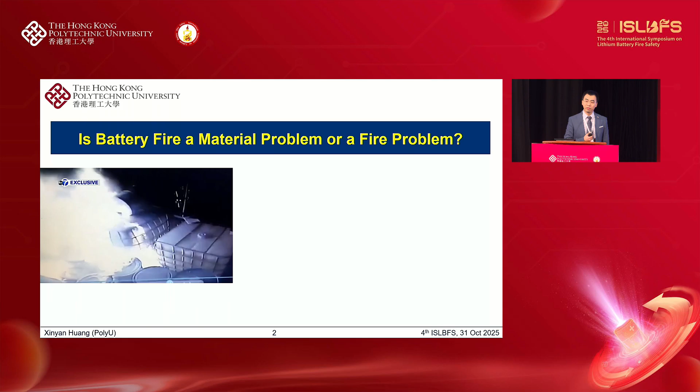This one is in a gasoline processing factory, and you can see a worker trying to clean up the containers, but unfortunately the gasoline is so flammable that even friction generating an arc causes an explosion and fire. Gasoline is really dangerous. I also see many short videos of people playing with gasoline in very dangerous ways. They don't even realize gasoline is really dangerous.

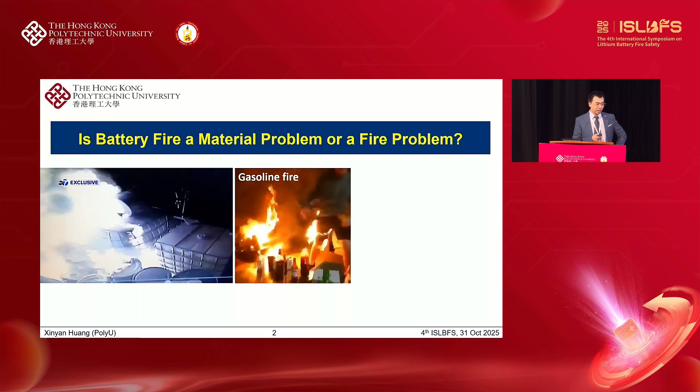But the question is, why don't we worry so much about the fire safety or fire hazard of gasoline, yet everyone talks about EV car fires? Not too many people talk about gasoline car fires. That's something I really don't know how to explain.

Until one day I saw this video. It's at a gasoline station, and you see someone forgot to take out their pipe, so it's a very dangerous fire. But what surprised me more is some random guy from the street just took a fire extinguisher and controlled the fire within 10 seconds.

This really impressed me, because I also teach my students about flash point concepts. Gasoline has a very low flash point - it's one of the most dangerous fuels you can think of. But some random guy on the street handled it in 10 seconds. This is the reason we don't really worry about gasoline fire, although it's considered one of the most dangerous liquid fuels on Earth.

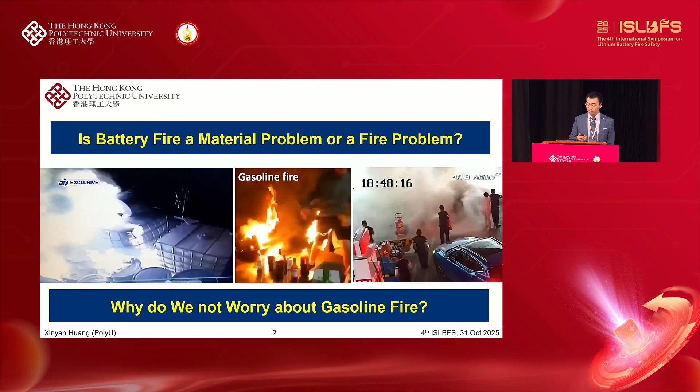So is the battery fire a material problem or a fire problem? No matter what the answer is, I've listed a rank of material fire safety. No matter how safe the battery is, I don't think it will be safer than wood or plastic. No matter how unsafe the battery is, it cannot be worse than gasoline, so it will always be something in between. No matter what battery material or technology is involved, it will follow that rank. That's my thinking.

So whatever material science does, you cannot change this rank. But what can be changed is the fire protection system. Fire protection can make gasoline feel not so different from wood or plastics. So if we can do something good, we can also make the battery no different than plastics and wood.

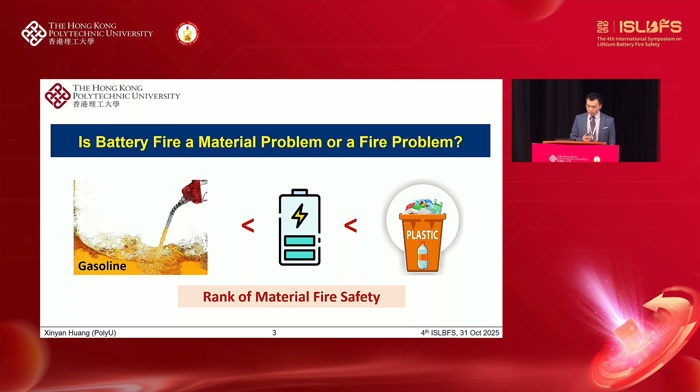Let me get to another question I'm also thinking about: what is the probability of a battery fire? I think insurance companies consider that a lot, and also manufacturers and warehouses. Many people consider these questions. I don't know the answer, but let's change the question - this question every fire engineer knows: what's the probability of a building fire?

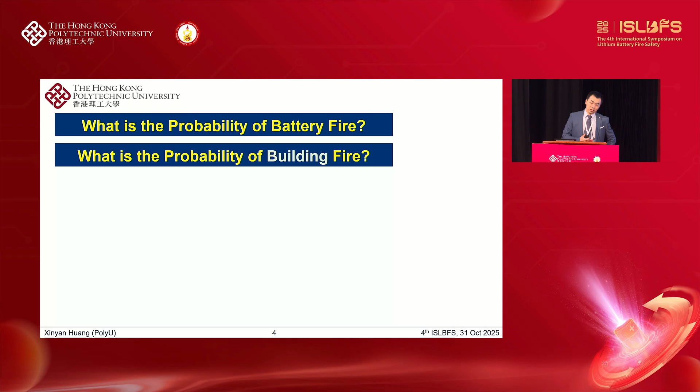Every fire engineer will give you that simple answer: 100%, because we assume the fire will happen. What's the probability of having a fire in this room or on this table? 100%, because even if we do everything so well, some crazy person can come here and do something crazy. So the fire will always happen.

So it doesn't matter, because as a fire engineer, we make sure even if the fire happens, we control it. Even if the fire happens, we make sure people can evacuate from the room safely. This is the reason for all building design. Why do we have two staircases for high-rise buildings? Why isn't one staircase enough?

Because we need to make sure even if the fire happens and one staircase is compromised, we still have another staircase to use. That's the reason almost every building in Hong Kong or many other cities is equipped with a very expensive sprinkler system.

The sprinkler head is very cheap, but think about the pipes, the space it takes, the maintenance cost of the sprinkler system - so expensive. Even though it's expensive, we still install it because we know fire will happen 100%, even by accident. So we need to make sure even the fire happens, we control it, we can handle it.

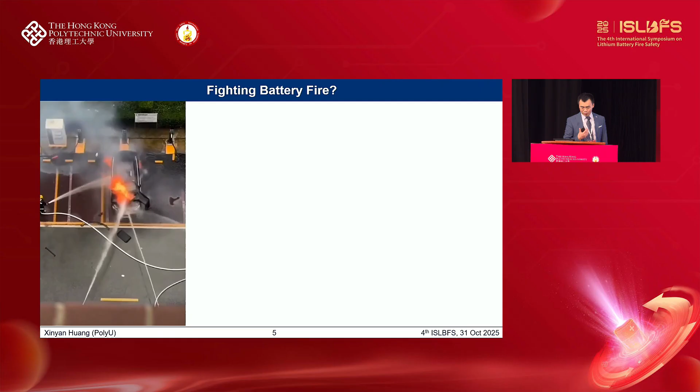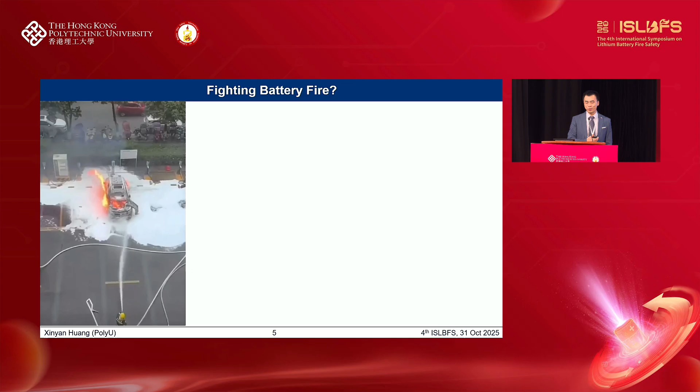So how do we fight the battery fire? You see a lot of these videos, like firefighters go to the fire scene, see some electric vehicle burning, and I don't know what to say - it's kind of useless, right? Sometimes I also talk to the firefighters, you should just cover the vehicle instead of embarrassing yourself, because people will take these videos and put them online. It seems like you're not doing anything. So if we cannot even stop the fire in a very small electric vehicle, how can we handle a massive electric bus burning in the square? That's impossible.

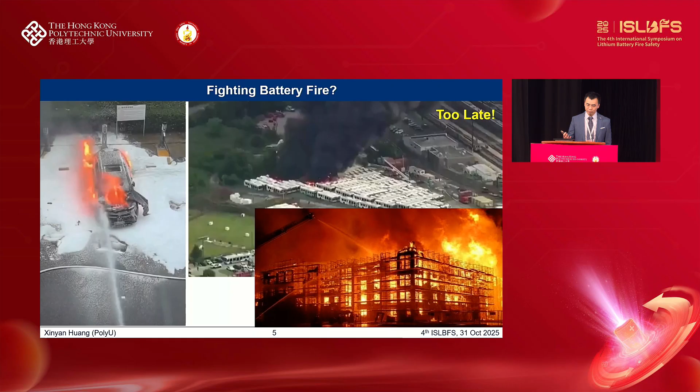And it also reminds me of something we handle a lot in building fires: when the building fire is completely out of control, you can see firefighters are not really extinguishing the fire - they just watch it and wait for the whole field to burn out. Because essentially there's no way you can stop a building fire like that. It's a very similar principle to how you cannot stop a massive car park full of electric vehicles burning outside.

So let's take a close look at what's the process of battery fire and compartment fire. So yeah, let me start this video.

So this is like a regular fire. You see the battery venting is on - this is a video accelerated. So you can see you have the venting, and you also have the fire afterward, right?

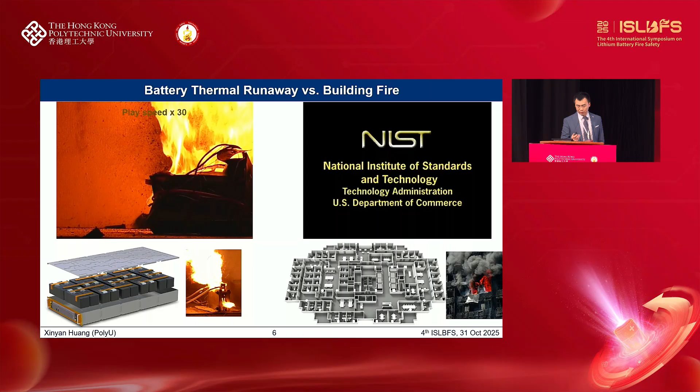If we take a closer look at the battery pack and a very typical floor plan, you will see they are so similar if we consider each cell as each room - maybe one small cell is the same as one small room. When the flashover happens, you see something very clear: you have that flame coming out from the room, seeking additional oxygen outside. We call that spilled flame. That's very similar to how you have the flame coming out from the battery. So if you consider these small elements, they actually look so similar.

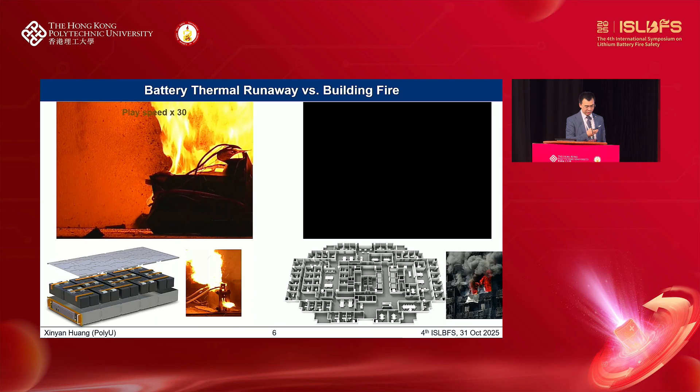If we look at the development of the temperature of any of these small cells, you'll see there are clearly two events: one is venting, the other one is thermal runaway, as we call it. If we put building fire, or compartment fire, room fire, as a comparison, we always have four stages of compartment fire: from ignition to fire spread, then the flashover event, to fully developed fire. So it's actually so similar if you look at thermal runaway and flashover.

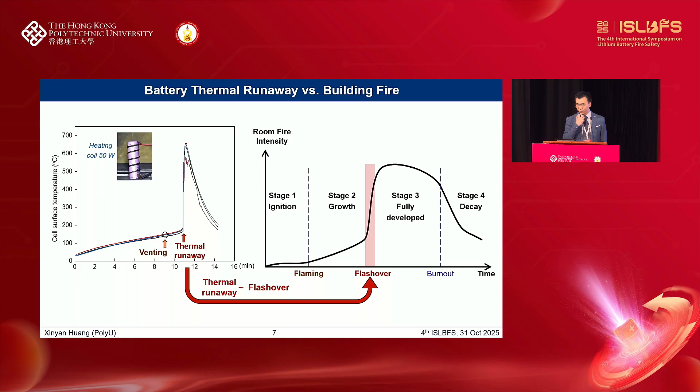And whatever happens after that is useless for firefighting. So that's what we see: you have the building and massive fire engines not able to stop the fire. It's the same reason that multiple fire hoses cannot even handle an electric vehicle fire.

So thermal runaway is not ignition, it's actually flashover. What is ignition? I think venting is ignition. After ignition, think about if we ignite this table in this room, the smoke will come out. It's very similar to the venting process. You have some smoke coming out from the confined space. So maybe this is really the ignition of the battery, not the thermal runaway. Venting should be considered the ignition of the battery fire.

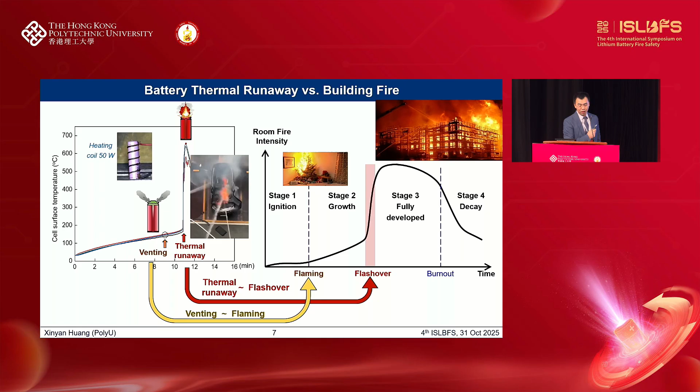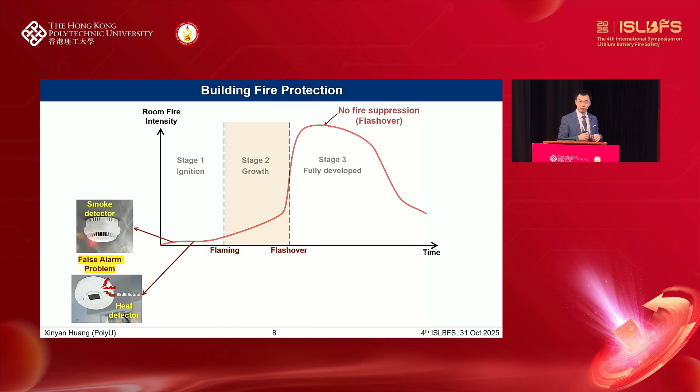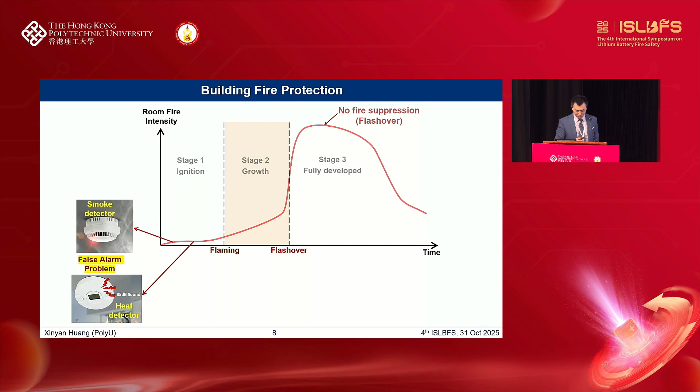So how do traditional firefighters or fire protection systems protect our buildings? We have multiple ways. During the ignition stage, we have smoke detectors in the room. When smoke comes out, it sends a beep, although you have a lot of false alarms, because when people smoke in the room, you also trigger the smoke alarm. But it's fine. We also have other things like the sprinkler system. So if you have some small flame, maybe this table is igniting, it will come out with a very long flame and quickly trigger the sprinkler, and the sprinkler will suppress the fire.

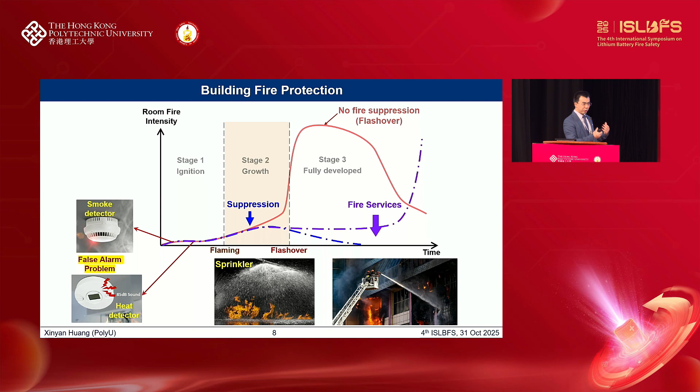Even if the sprinkler is too weak to control the fire, you can delay the flashover. That's the principle. Then, with collaboration, the firefighters can come, so the sprinkler gives additional time for the firefighters to stop the fire, and also gives people time to evacuate. So this is a design principle for building fire protection.

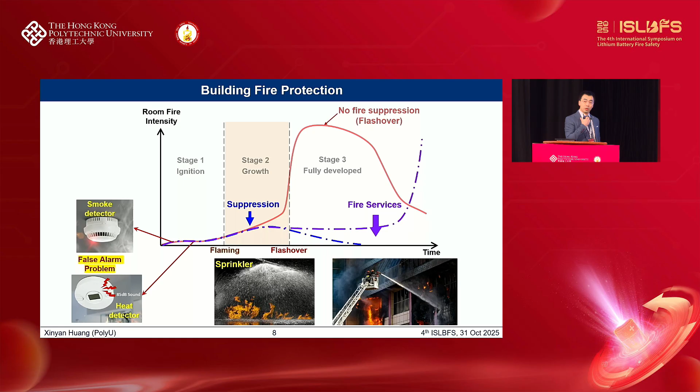So what's our current design for the battery? We have a lot of things, for example gas sensors, measuring hydrogen and other kinds of signature gases for battery thermal runaway. Yes, we have these sensors for the battery, and of course a lot of false alarms, similar to the smoke detector inside the room. So one thing that's missing is we don't have the sprinkler for the battery system.

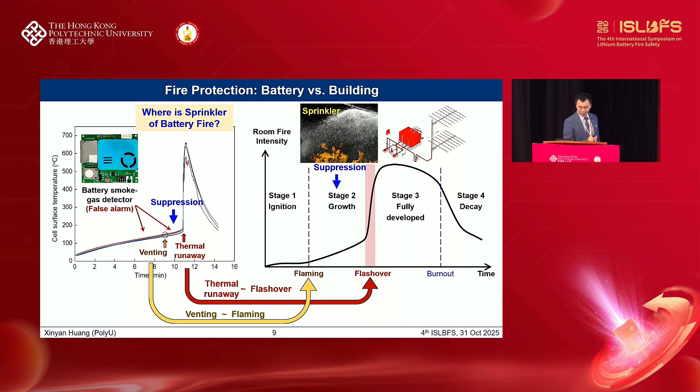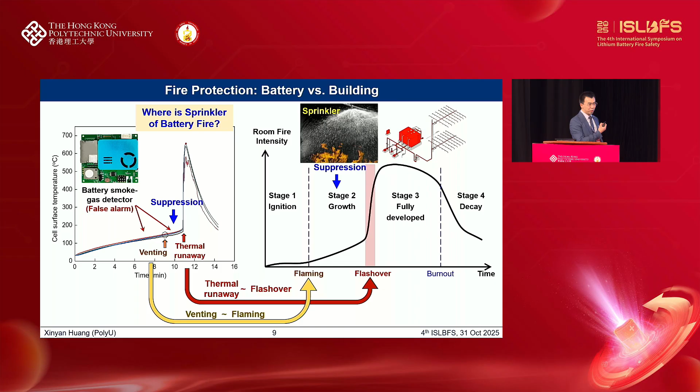Where is the sprinkler? Before the thermal runaway, or before the flashover. That's something actually missing here. So everything dealing with battery fire is after the thermal runaway, but that's already too late, because we all know when the thermal runaway, when the flashover happens, we cannot do anything for the building fire. Same thing, we cannot handle thermal runaway of the battery fire, because it's already too late.

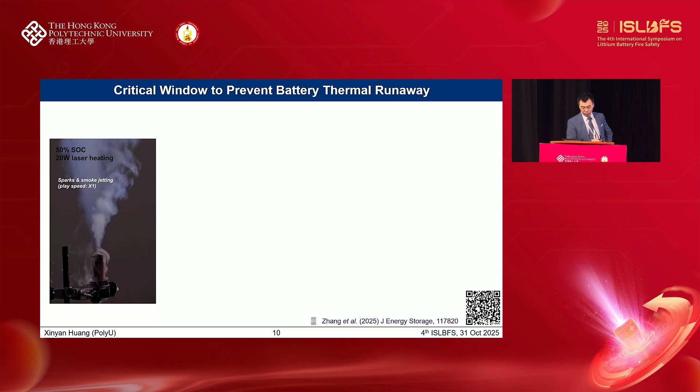So that's the reason we did a little experiment in the lab. We use a laser to ignite the battery, and now the venting happens. We keep using the laser to ignite it, to heat it. And as you can see, even as we continue to heat this battery, it still takes about 3 to 5 minutes before it actually goes through thermal runaway. The video is accelerated, so you can see after about 5 minutes you have a very strong thermal runaway and flaming.

If you take a look at this time evolution, you can see a clear time window here, between venting and thermal runaway. That time window can vary from 1 minute to 5 minutes, depending on what kind of battery you are testing. So you have a time window here, you can do something, but I don't think any company in the world is doing anything for this time window.

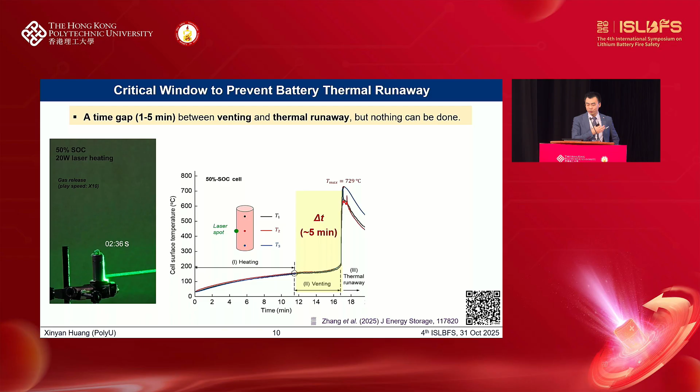You just let it happen, you just let the thermal runaway happen. So can we do something? Can we have some sprinkler system for the batteries, a sprinkler, not a real sprinkler? That's what we did in the lab.

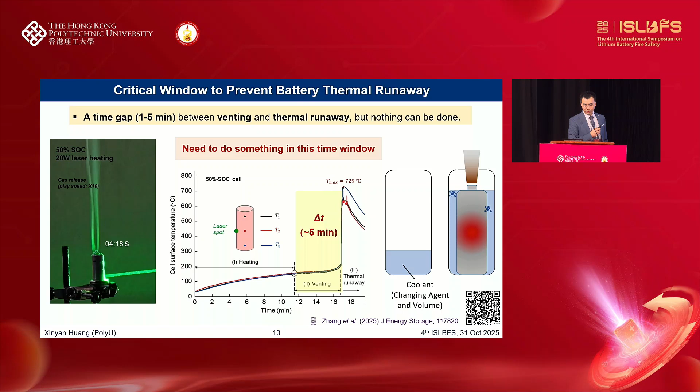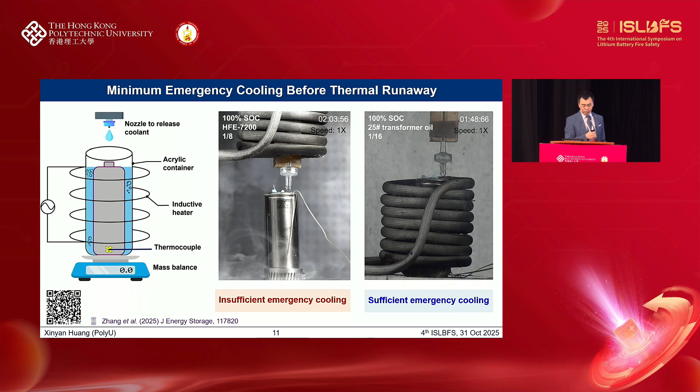My student did all these experiments, and he is designing a very smart device. He used magnetic induction heating to heat the battery. And once it starts venting, he drops some cooling agent and sees how much of the agent is needed to actually stop the thermal runaway. Of course, if you put too little cooling agent, the thermal runaway will continue to happen.

And if you put too much, then you are wasting a lot of the cooling agent. So what we want to do is try to find out the minimum amount of cooling agent that actually stops the thermal runaway from happening after venting. You can see on the left-hand side, clearly we don't put enough cooling agent, so the smoke keeps coming, and eventually it evaporates all the cooling agent.

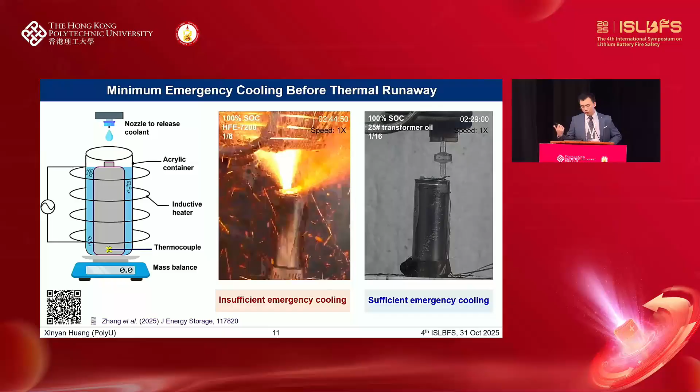So the thermal runaway will continue to happen, but on the right-hand side, we have enough cooling agent. You can see bubbling coming out, but the battery eventually does not reach the thermal runaway stage.

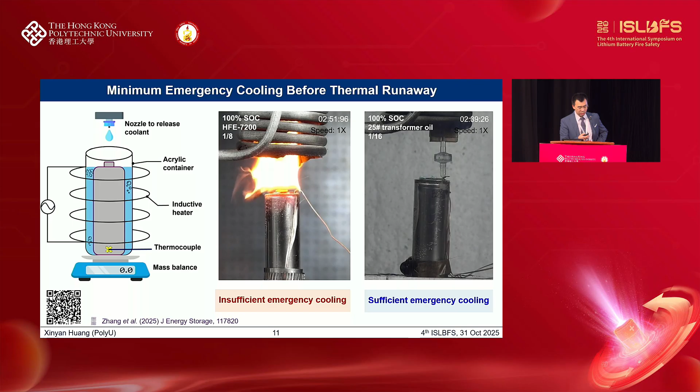We found a very interesting result: you only need 1/16 volume of the battery in water to stop the fire. So for the 18650 battery, it means you only need 1 milliliter of water after venting to stop the thermal runaway fire.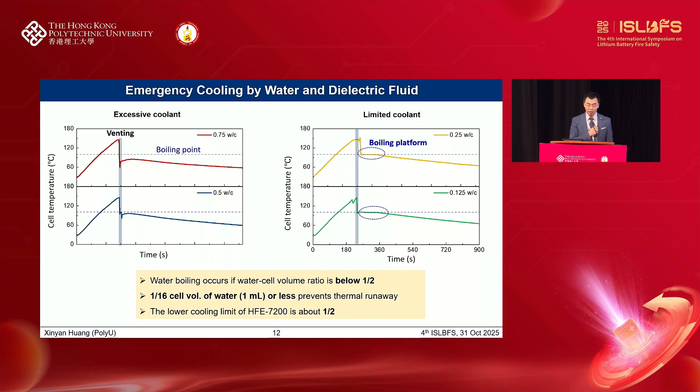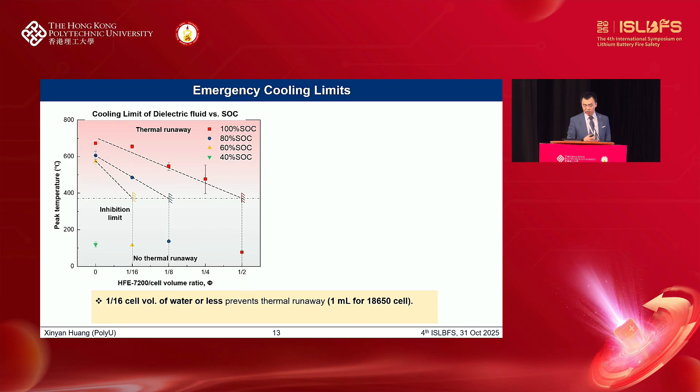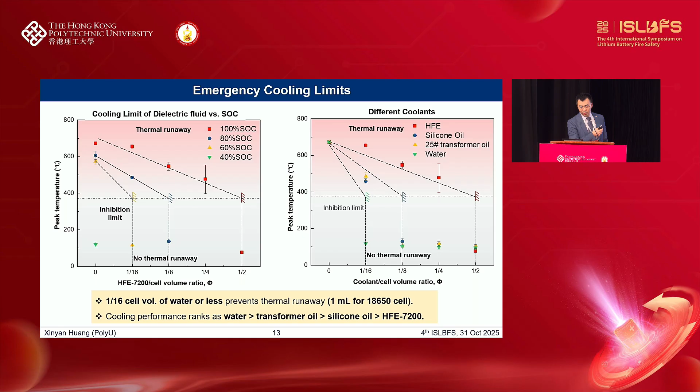Of course, for different SOC you have different requirements - a higher SOC needs more water or other cooling agent. We tested 4 different types of cooling agents: transformer oil, silicone oil, dielectric liquid, as well as water. The similar thing is, approaching the limit, all these liquids will enter the boiling stage, because the limit is controlled by when all the cooling agent is evaporated. That gives you the limiting condition.

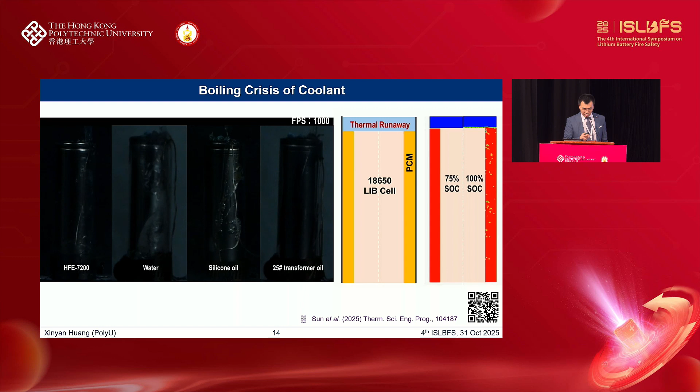So what I want to say is we should do cooling early, not later - you have to cool before the thermal runaway happens. Of course, I'm not telling you to randomly spray water onto a normal operating battery - that definitely harms the whole system. What I'm saying is you should cool when you are very confident the battery will go into thermal runaway.

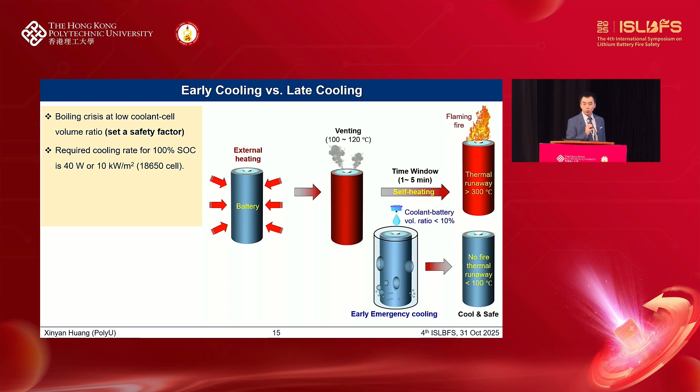But clearly, we are not doing anything about this. What we are doing is putting a thermal runaway battery into water, and you can see even with a car in the water, you still have flame on the surface. So water or other firefighting techniques cannot solve this problem after thermal runaway, because it's already flashed over.

You have to act when you see the ignition just happen. I think venting is a good moment to define that ignition point. Of course, we've only tested small battery cells - we don't know the scaling law for larger batteries, whether this limit or the venting design holds, or whether it can be adjusted. So a lot of research can be done for bigger batteries.

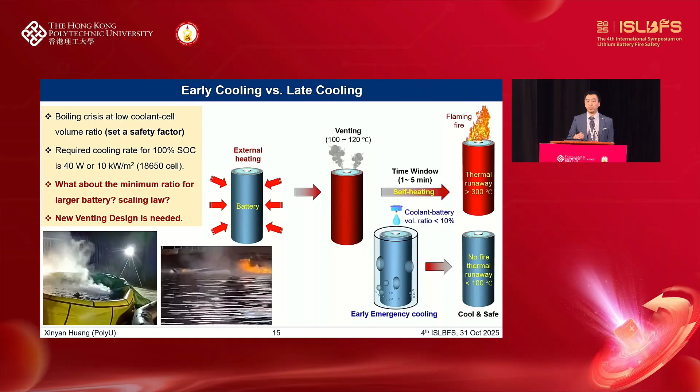I talked about my ideas with some battery manufacturers and they gave me feedback - they say 5 minutes is not enough. So even though I know thermal runaway happens 5 minutes after venting, it's not enough time for me to design a good system to protect our battery.

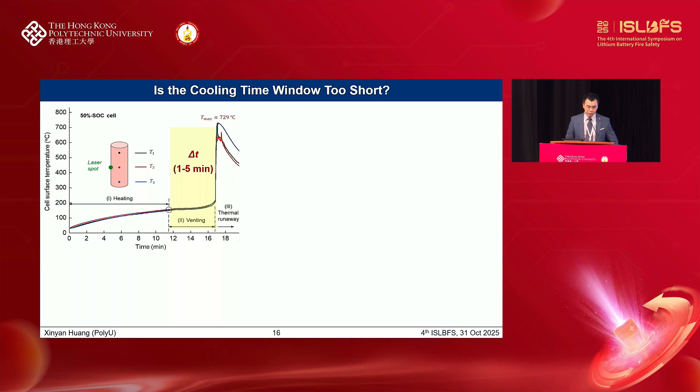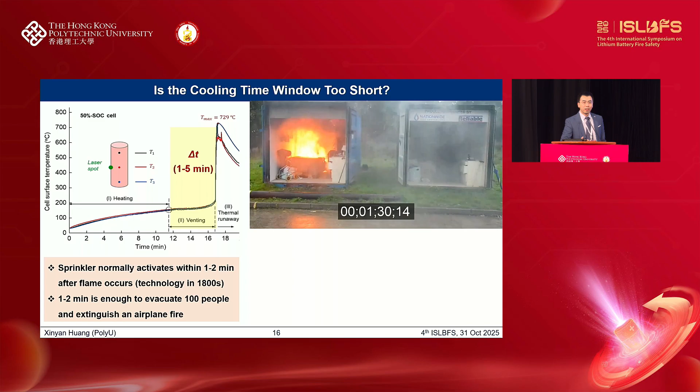Then I show this video - a very typical sprinkler system installed in a building. You can see a normal sprinkler system can activate within 1 or 2 minutes. It's actually a very simple design - the sprinkler has 150 years of history. It's very old technology and it can handle things within 1 minute. You tell me you cannot do it within 5 minutes.

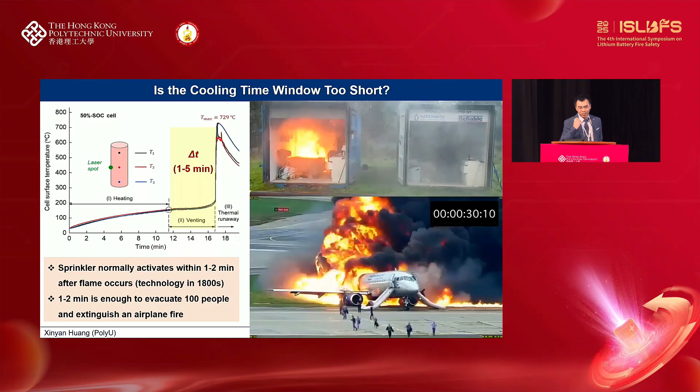And I show another one - this is an airplane that caught fire. You can check the timing, it's not accelerated. Within 1 minute, you can see more than 100 people evacuate from this airplane. If 100 people can evacuate from an airplane within 1 minute, don't tell me you cannot do anything for the battery in 1 minute. That's not a good excuse.

Anyway, because I'm a fire engineer, I learn most of my things from building fires. I think it's good to always look back and think about what fire engineers have been dealing with in building fire, because it has been worked on in this area for more than 150 years. We have established a lot of things for buildings, and we can always learn these techniques from building fire protection. According to the European standard, we have 7 layers of fire protection for buildings.